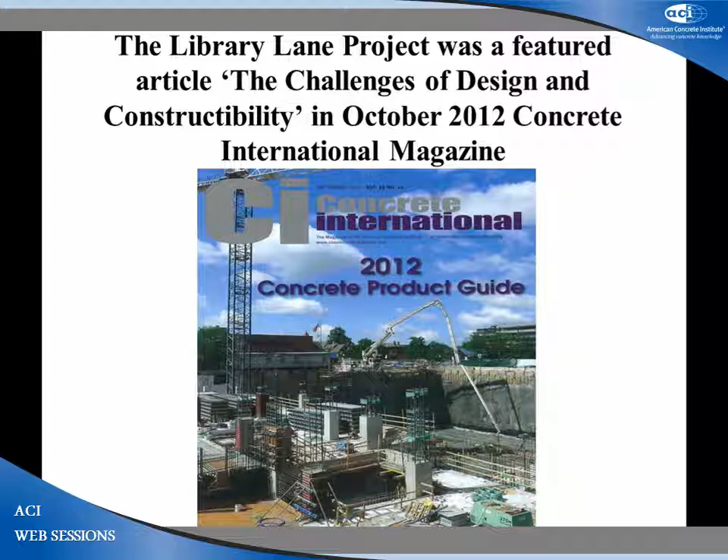A quick thank you to the team, and it was a team effort. It was one of those jobs that we thought was never going to start, which actually worked to our benefit because we were able to do all our homework, and by the time we got ready to place concrete, we pretty much had all the answers to the questions.

So thank you to Carl Walker Inc., Chrisman Construction, who was the CM on the job, Chrisman Constructors, who were the ones that actually placed and finished the concrete, and of course our good friends at Doan Ready Mix, who supplied all the concrete and gave us the opportunity to do what we did with the mixes. Not always are ready-mix producers willing to allow admixture people, or cement people for that matter, in on the process, because we brought the cement manufacturer's QC manager into this also in the early phases of it. But a thank you to everybody.

Like I said, it was a 55,000 yard job, high strength, low shrinkage. It was interesting. We did this talk for the Carl Walker people down in Kalamazoo, Michigan, and they broadcast it to all their locations across the country. And it was interesting. Gail Vasana said to me, 'Is our specification too tough?' And if anybody has ever worked with them, their specification is quite tough.

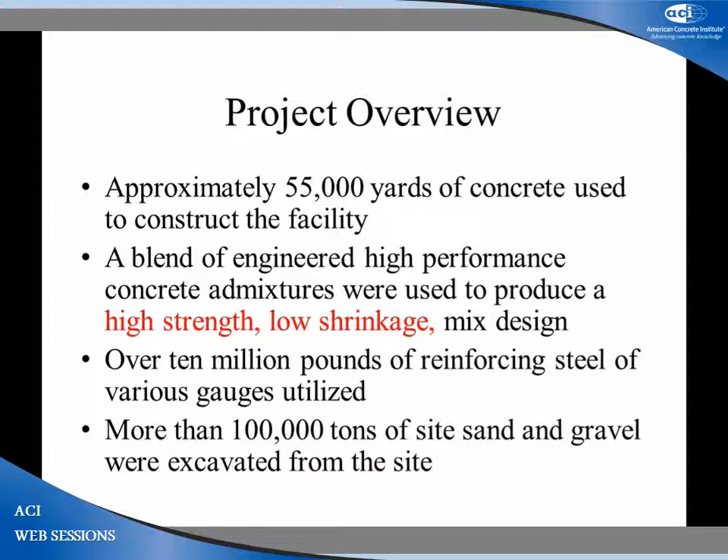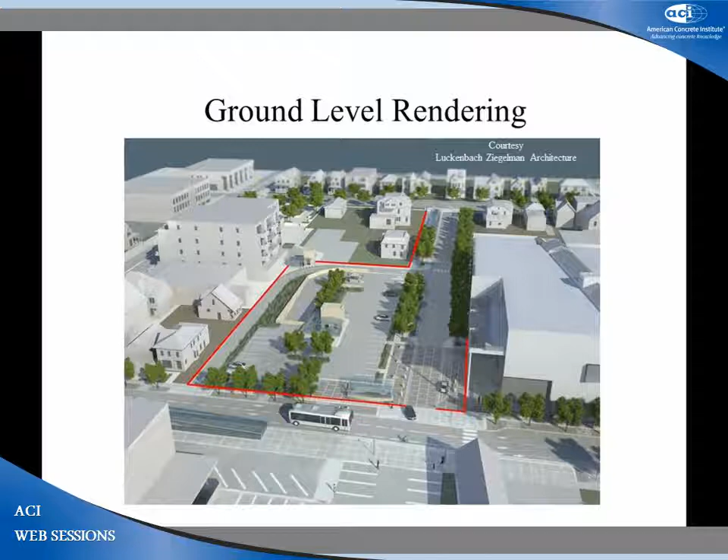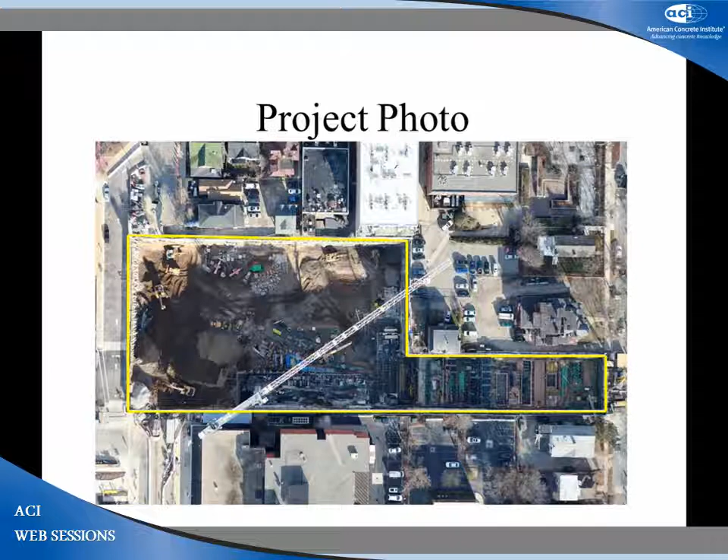What an engineer wants and what a contractor needs are not always one and the same. And our goal for this job was to not only satisfy Carl Walker, but also to satisfy Chrisman Constructors.

In the article, in my portion, I asked the question, is it possible to design a perfect mix design? By the time I get done here, I hope you will agree with me that the answer is yes.

The title was Challenges of Design and Constructability. It probably should have been more like Challenges of Design versus Constructability, because engineers and contractors are not always on the same page at the same time.

I'm going to discuss briefly the two main concretes in the project. We had a 20,000 yard mass mat placement, and it was interesting because they were back and forth on what type foundations they were going to use for quite some time, but that bought us time to design our mixes, take time for all the shrinkage tests and so on. So it worked to our advantage, and at the end, when they decided they were going to do a thick mat foundation, of course the ready-mix producer, myself, and my cohort Tony Candeloro, I think we went out and had a beer, because that was another 20,000 yards that was going to be placed on that project.

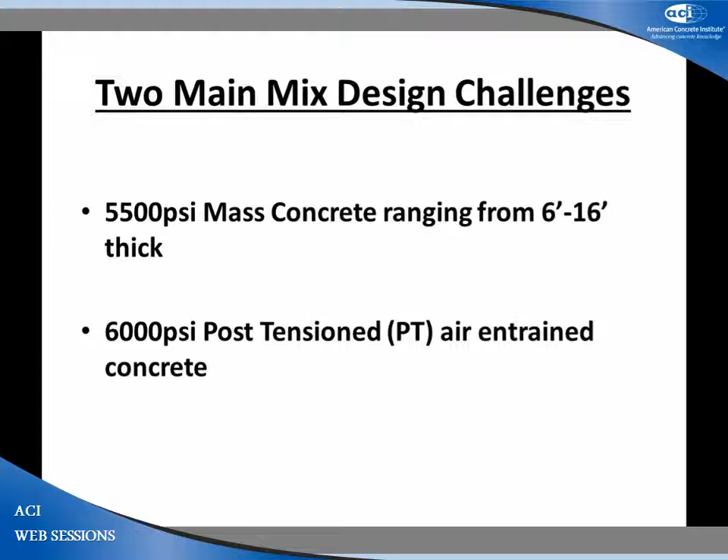Briefly on the mass concrete, as so many specifications say, maximum concrete temperature at placement is 70 degrees. This can be a huge problem, and in my opinion, unless you're designing mixes that have boulder size aggregates and you have cooling coils in the concrete, you can't always do what we would like to do with mass concrete.

If you prescribe, as I do, to the 'if you can't keep it cool, keep it warm' theory with mass concrete, then all of a sudden that maximum concrete temperature at placement is not the key number we're looking for. What we're looking for is what our ultimate internal temperature of that concrete is going to be.

So as a team, we agreed to forego the 70 degrees. Let me back up one second: when this was all going on, originally the mat placements were going to be done in the summertime, so that made this 70 degrees maximum temperature even more critical.

Anyway, as a team we agreed that wasn't the number to focus on. 160 degrees, which is pretty much accepted in the industry, was the maximum internal temperature we could wind up with, and we would focus on the differential between the internal temperature and the temperature at the outside of the concrete — that's our delta T.

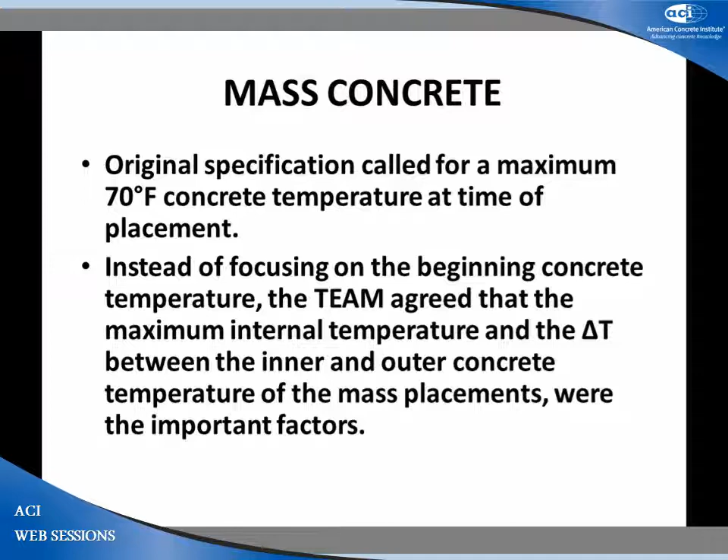Again, we agreed on a maximum of 160 degrees. Our maximum delta T was 35 degrees. There are some now that say, since this was a limestone mix, you can go to 45 or 50, but we stayed on the conservative side. So our maximum internal versus external temperature had to be maintained at no greater than 35 degrees Fahrenheit.

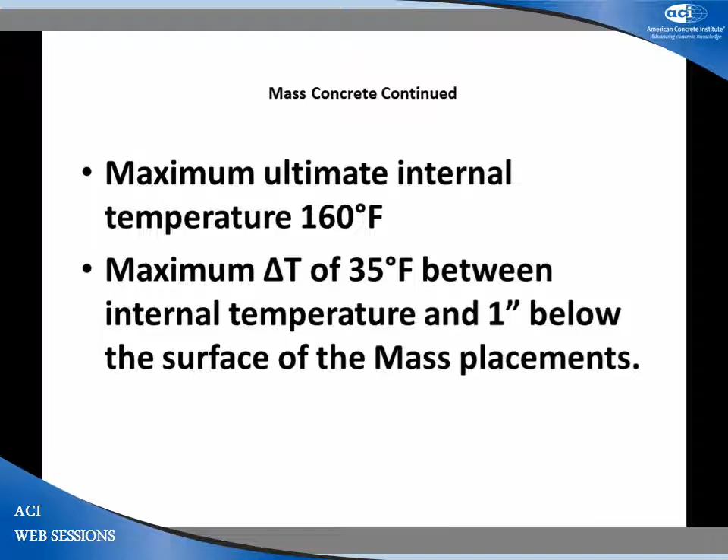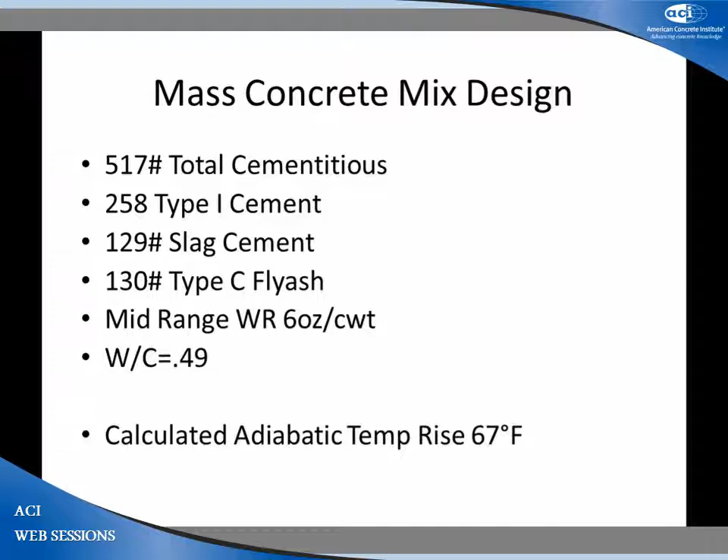So what that told us is that as long as we didn't exceed 90 degrees, plus or minus, with our initial concrete temperature, we would not go beyond that 160 degrees. We did a mock-up, a 10-foot by 10-foot by 10-foot mock-up with thermocouples, protected it, did all the things we would do when we got ready to place the concrete. We were able to determine we were not going to exceed that 160-degree maximum internal temperature.

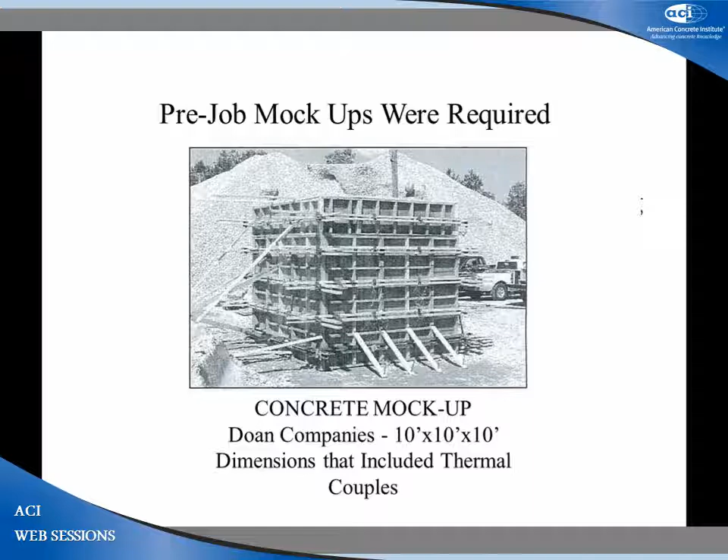Well, as a lot of jobs go, the job that was supposed to go in the summer actually went mostly in the winter for the mass concrete. Now we were not concerned about our maximum temperature, but actually what our minimum temperature was going to be. That was pretty easy to take care of, but for those who have prescribed to the 'if you can't keep it cool, keep it warm' theory, maintaining that 35-degree delta T in the wintertime is much more difficult than in the summertime, because in summer the ambient temperature works in your favor, whereas in winter it works against you.

So the contractor had a lot of experience with mass concrete, and they placed down 2-inch rigid insulation, then concrete blankets over the top of the mass placements, and everything went quite well.

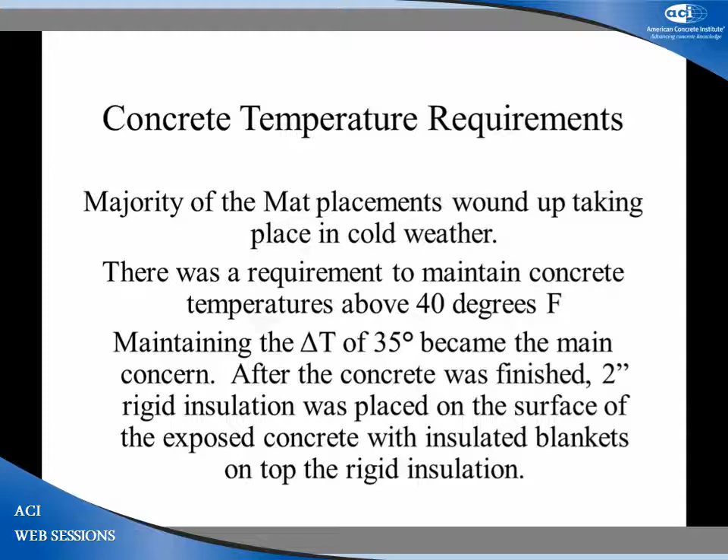The largest placement was 5,700 cubic yards of the 20,000, and it was noteworthy because for those of you that don't live in the North Country, in Michigan we have something referred to as frost laws. And what that means is when the frost laws go on, sometime prior to spring, and this year who knows what date that was, but the frost laws have been on since February 1st.

What that means to a contractor and a ready-mix producer is that instead of hauling 10 yards of concrete, now you can only haul about 4. Well, how in the world are you going to place 5,700 cubic yards at 4 yards at a crack in an urban setting? Obviously, this wasn't going to happen.

So the powers that be in the city of Ann Arbor forewent the frost laws, and also the street we had to work off of was a one-way street going northbound, and they had to change the direction of the street to allow the trucks to come in southbound. So it was more of a logistical problem than it was concrete, because mass concrete is pretty easy.

In any event, 5,700 yards, stone concrete, drivers drove the first 14 hours, and then their crosstown competitor actually agreed to supply drivers to drive the next 12 to 14 hours. Well, they get over there, and as things happen, they had forgotten their proof of insurance. So now all of a sudden they're at a dead standstill after 14 hours of placement.

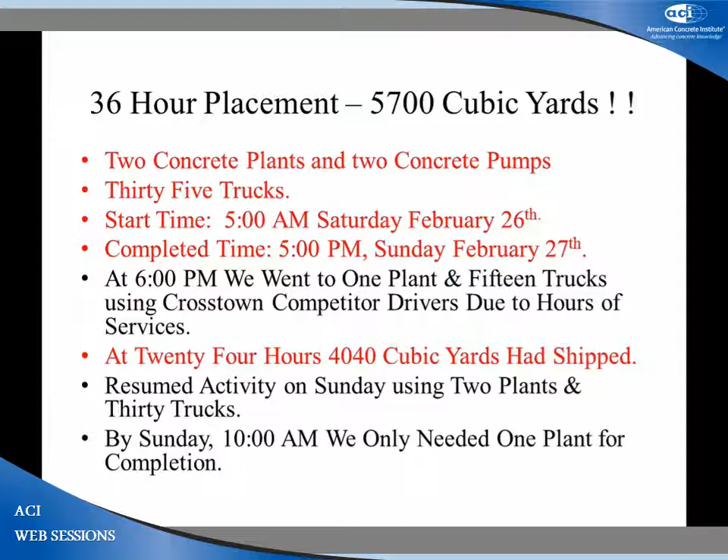The 5,700 yards doesn't sound like a lot, and I was involved with the placement at Metro Airport some years ago, Detroit Metro Airport, where we did 21,000 yards in 23 hours. And I think that may still be a record in the United States. But that was a particular situation - we had not only the urban setting, but we only had one place for 2 pumps to be located. So logistically, it was a very tough pour.

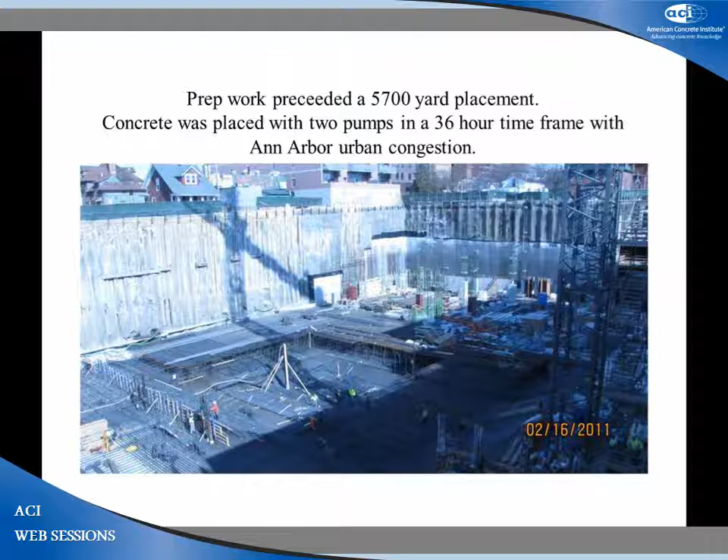Okay, I'm going to move on to what I really want to talk about now, and that's the designer's needs for the post-tension slabs. In this case, it was 6,000 psi air-entrained concrete. That becomes significant in a moment. I'll show you - water cement ratio of 0.40.

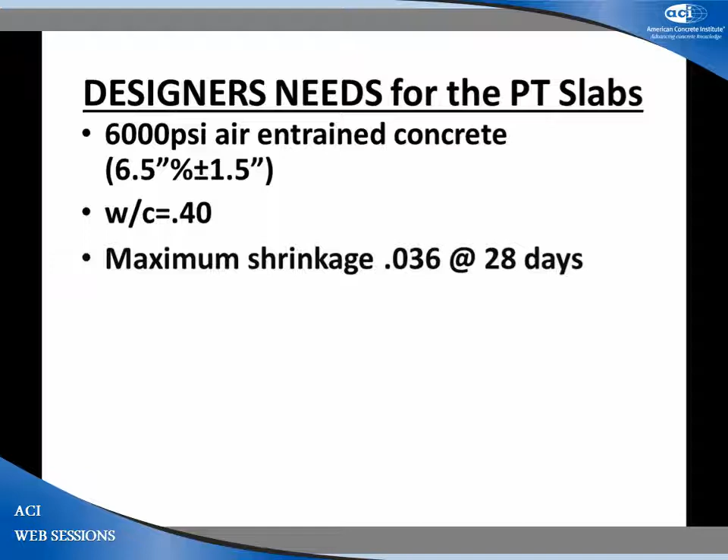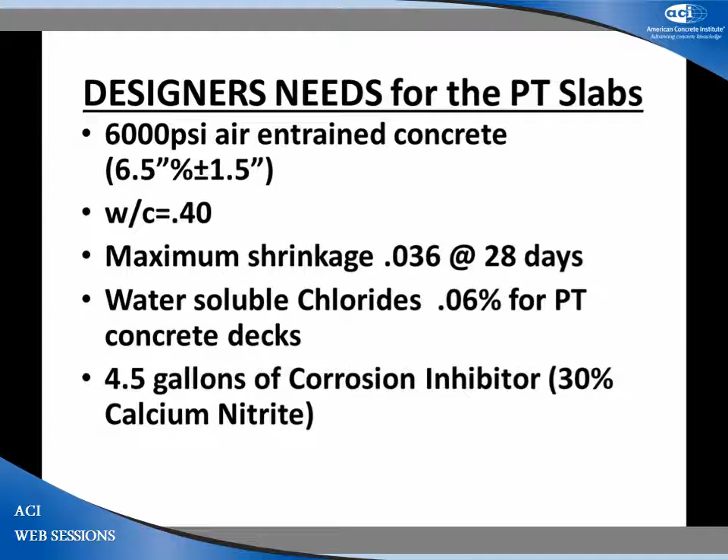Maximum shrinkage at 28 days of 0.036. Water soluble chlorides 0.06 for post-tension decks. Here's the kicker: 4.5 gallons of a corrosion inhibitor that contained 30% calcium nitrite. For those of you that have worked with corrosion inhibitor like this, they're very good corrosion inhibitors, but they're also wonderful accelerators. 4.5 gallons is a large dose. Typically you see 3, maybe 4, but 3 primarily, and this wound up being 4.5 gallons.

Lots of testing on this job. Every load of concrete was checked for air. Every load. Microwave testing, our wonderful friend the microwave. In the Midwest, we're not real comfortable with the microwave. I know on the East Coast it's an everyday occurrence, but we haven't had a lot of success, I'll be quite honest with you.

Our first pour, our first mass pour, was a 1,500-yard placement, and they started getting water cement ratios from the microwave of 0.67 when we're looking for a 0.49. Well, the concrete was too beautiful, and everybody agreed, we'll figure out what's wrong later. We even actually went to the extent of pulling more water out and putting more mid-range in, and our water cement ratio, according to the testers, went up. So we knew there was something wrong. As it turned out, it was simple calculations, and after that, everything went well.

But they did cylinders at 50 to 100 yards. It was a very highly tested job. They actually did hardened air testing, and luckily where they cored, our hardened air parameters were perfect. So we got lucky there.

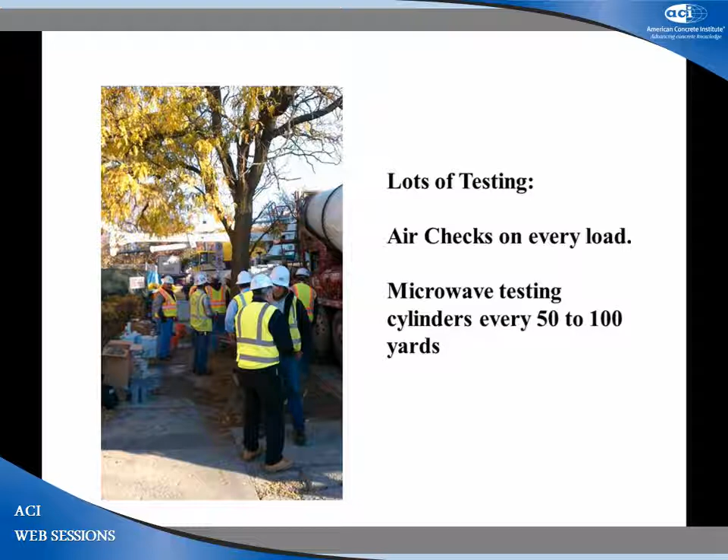Those were the designer's needs.

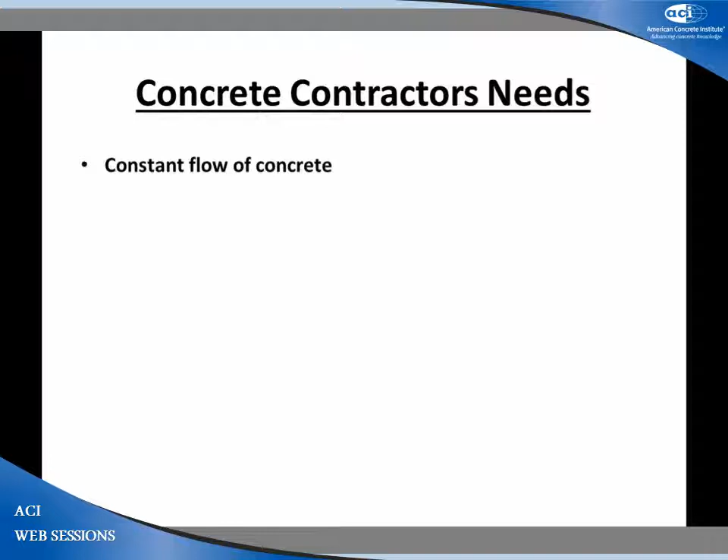Now the contractor's needs. They needed a constant flow of concrete, obviously. They needed a ready mix producer that was going to get concrete to them nonstop to keep the flow going. And that can be a challenge in itself in an urban situation. The concrete had to be pumped a city block in most cases, because like I showed you, we were stationed at the east end of the project and had 2 pumps there on a residential street, and that's where everything happened from.

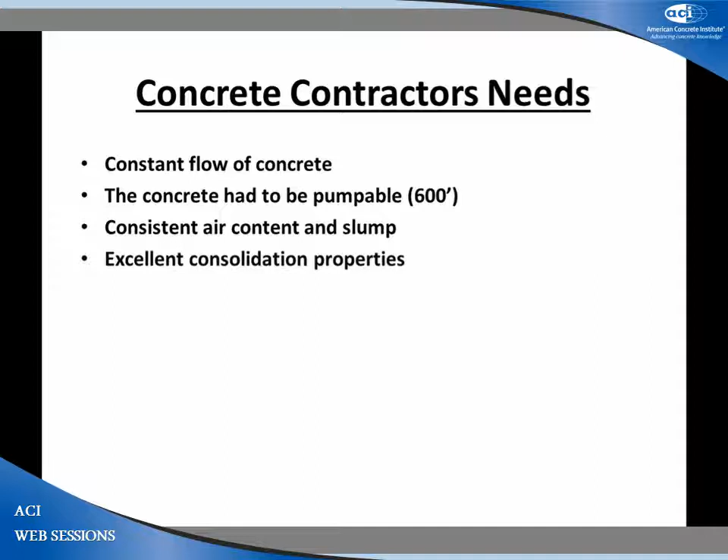Since they were testing the concrete, we needed consistent air and slump. The concrete also needed excellent consolidating properties because of the post-tensioning tendons and the reinforcement in the columns. As they were placing the concrete, it had to be easily consolidated.

It had to be easily placed and broomed. This was more of a situation in warm weather, because the contractor was doing a similar job in another city at the same time, and they were having all kinds of problems. They were having to pour at 3 and 4 o'clock in the morning and still weren't having a whole lot of success. So the pressure was on us to design something that would work a whole lot better than that, something that was easily placed and finished.

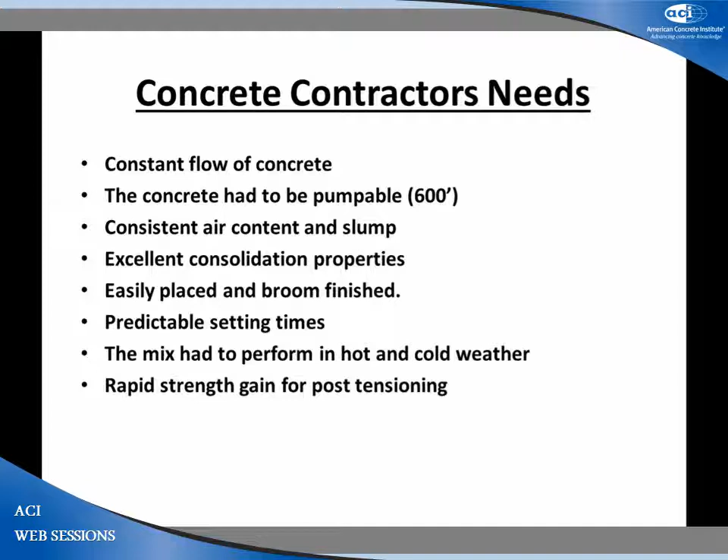They needed predictable setting times. The mix had to perform in both hot and cold weather, because we did as much concrete in the wintertime as we did in the summer. And after all these things, they needed rapid strength gain for post-tensioning purposes. They wanted to be able to post-tension in 24 to 48 hours maximum, winter or summer.

The challenge, obviously, was to meet Carl Walker's specifications, which were numerous, and also to manipulate the concrete so it acted like 70-degree concrete on a 70-degree day. That was really the challenge.

Whenever you see a specification that calls for a water-cement ratio of 0.40 or less, the first thing that comes to mind for someone designing concrete is the use of a high-range water reducer. For structural concrete, I agree wholeheartedly, but I started my career as a finisher, and I tend to look at concrete more through the eyes of a flat work contractor. A high-range water reducer may or may not be suitable for finishing concrete.

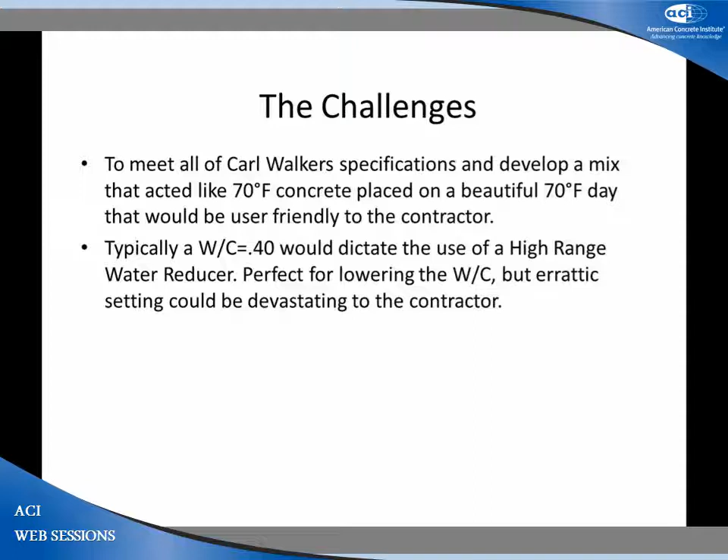The real challenge, besides everything else in the specification, was that the spec called for 4 gallons of the corrosion inhibitor. Because of the water-soluble chlorides of the concrete we produce, we had to add an additional half gallon to compensate for being over a little bit. So we wound up with 4.5 gallons.

And did I mention the concrete was air entrained? Carl Walker is a stickler for wanting their air to be perfect.

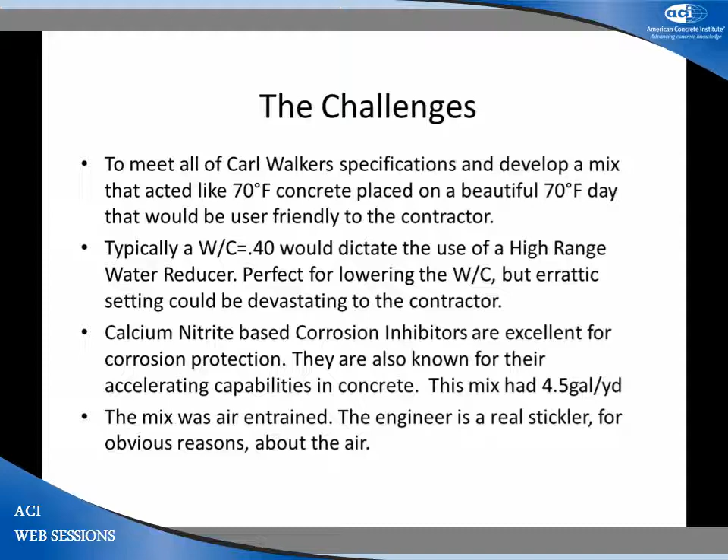What were the solutions? First, we determined how much cementitious—really, how little cementitious—we could use to make 6,000 psi air entrained concrete.

If you use too much cementitious material, that drives your water-cement ratio up, it drives your shrinkage up, it drives a lot of things up. So the goal was to use as little cementitious as possible, but still make our 6,000 psi at 28 days.

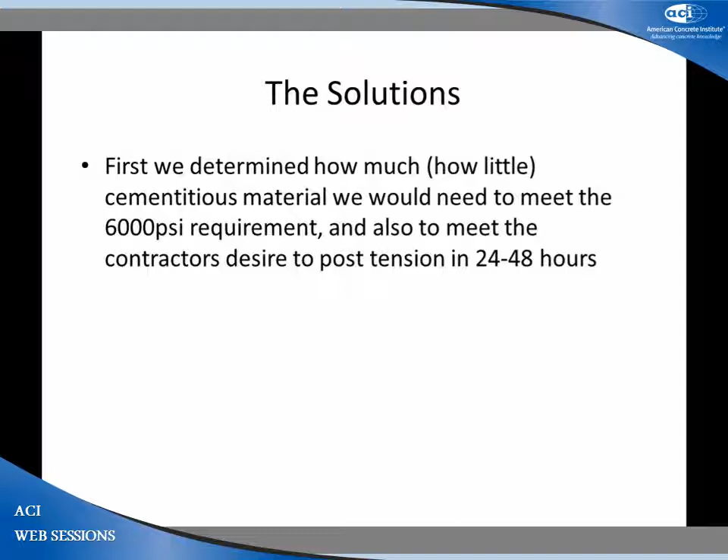But on the other side of the coin, we had the contractor who wanted to be able to post-tension in 24 to 48 hours. So it's one of those situations where they wanted their cake and to eat it too.

After analyzing the amount of fly ash and slag that Carl Walker would allow us to use, we determined the amount of cementitious material we wanted to use, and we started looking at what we needed to manipulate this concrete so it would set properly. We'd already satisfied Carl Walker's needs; now we had to satisfy the contractor's needs.

So we set out to manipulate the set of the concrete with the use of admixtures. Again, our goal, whether winter or summer, was to create concrete that set like it was 70 degrees on a 70-degree day.

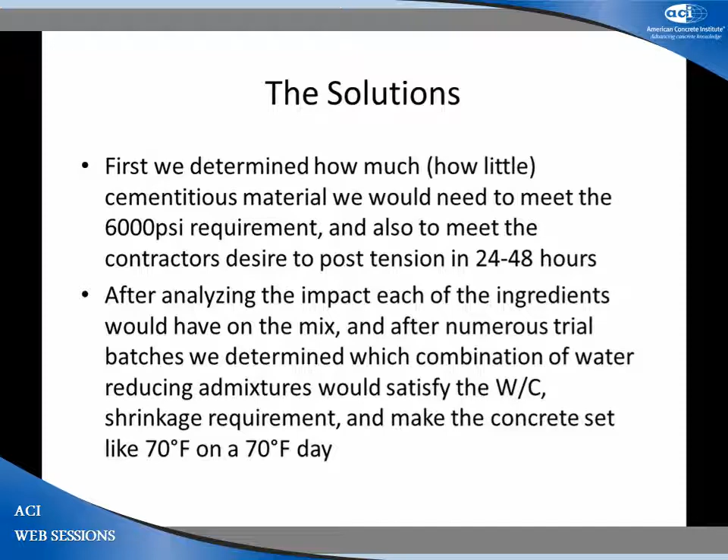60% fly ash, 15% slag, 25%... sorry, 60% cement, 15% slag, 25% fly ash. The 15 and 25% were set in stone by the specification, so we couldn't go up or down on those. We did use a crushed 1-inch limestone. We took a page out of Bill Phelan's Athletic Concrete book and tried to maximize our coarse aggregate.

Knowing we had to pump this concrete a city block, we did have restrictions in that regard. The mix has 4.5 gallons of corrosion inhibitor, and we had 223 pounds of water, which is a 0.40 water-cement ratio.

And this is where it got fun. We wound up using 6 ounces of what I'll refer to as a hybrid mid-range. It's a lignin-based product with a splash of polycarboxylate and a defoamer. Then we used 5 ounces of a traditional lignin-based water reducer, knowing we got decent water reduction with this combination, but we knew we were getting quite a bit of retardation—that was our goal. Our goal was to offset the acceleration of the corrosion inhibitor.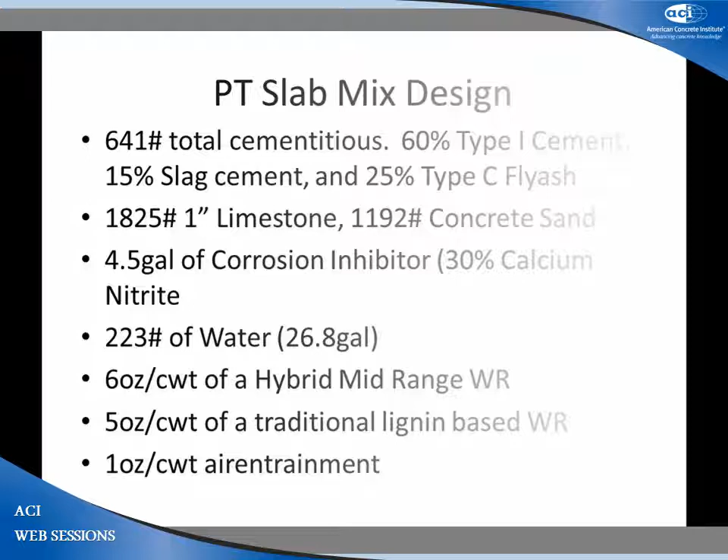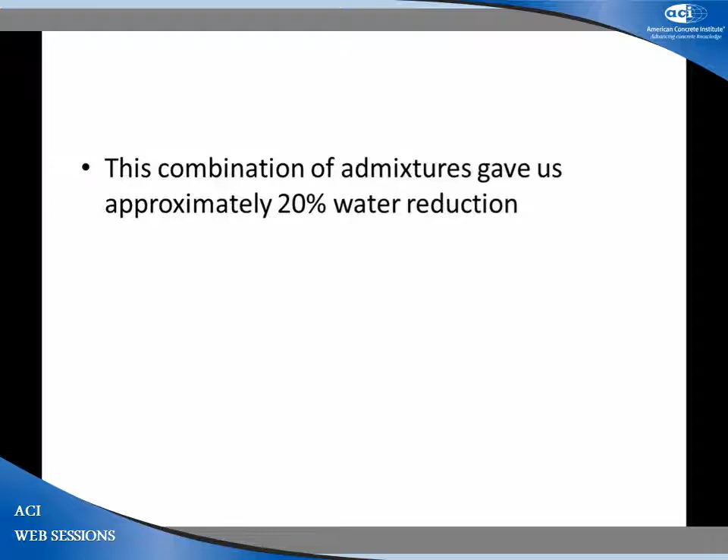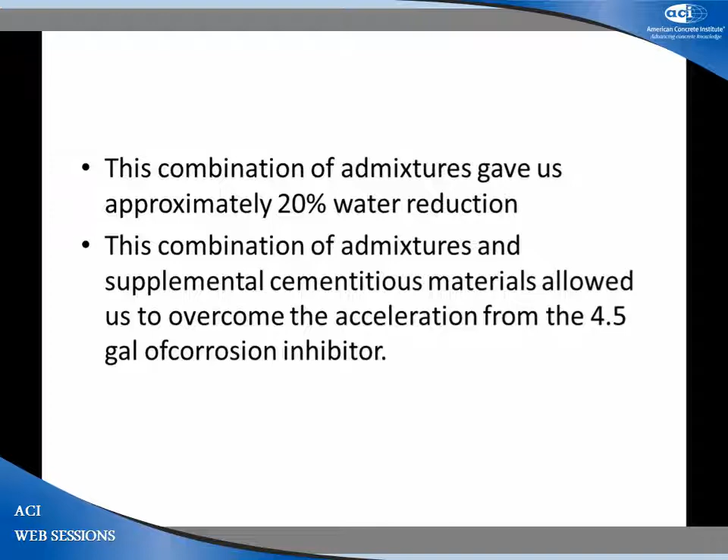The combination of admixtures we used gave us approximately 20% true water reduction, so we got into that high range category, but we didn't use a high range product to do that. The combination of admixtures and the supplemental cementitious materials allowed us to overcome the acceleration of the 4.5 gallons of corrosion inhibitor. We did testing.

The concrete contractor thought we needed more water in the mix in order for his finishers to have time to place and finish the concrete. So we did a test pour to accomplish a couple of things. We redesigned the mix, added water, which also meant we had to add cementitious material.

We placed our mix and let the finishers decide which concrete they wanted to use. We also used this as our example for the owner to decide what type of broom finish they wanted, since there's a multitude of broom finishes out there. As it turned out, the finishers chose the mix we had already put together and tested, thank goodness. I don't know what we'd have done if they'd gone the opposite direction—we'd have had to start over, but again, a lot of testing.

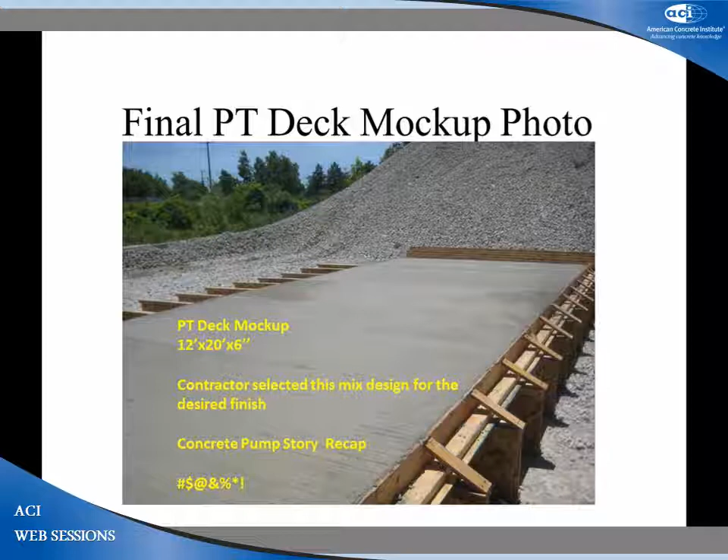The interesting thing about this concrete—it outperformed my expectations in a couple of ways, but it did not bleed. This concrete never bled. In the wintertime that was great because we didn't have to worry about bleed water freezing. But in the summertime, I was concerned we wouldn't have enough lubrication for the finishers to do what they needed to do. It did not turn out to be the case.

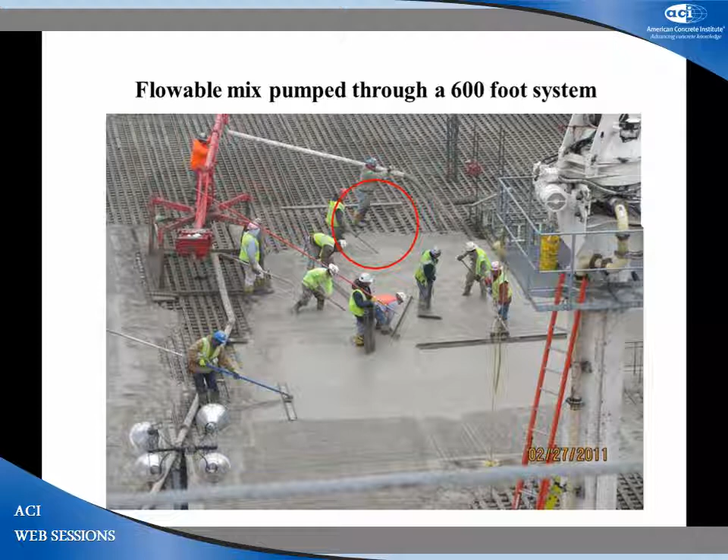We placed the concrete typically in the 7 to 8 inch slump range. We were losing virtually nothing through the 600 feet of pump line, and we weren't losing more than 0.5% air either.

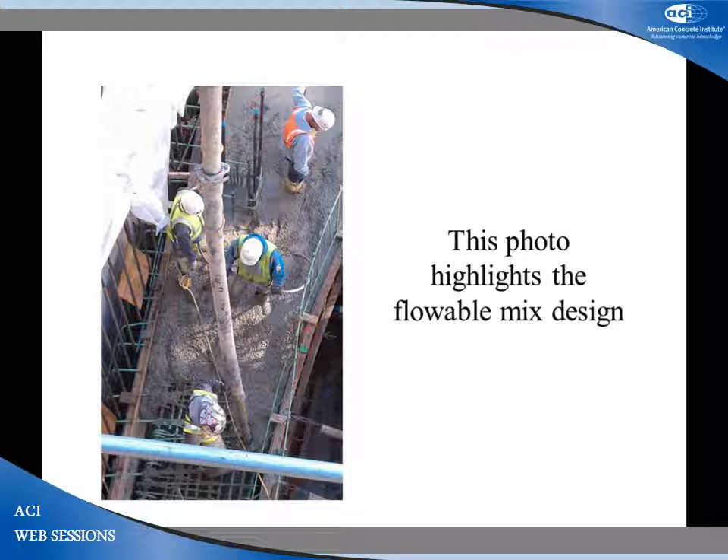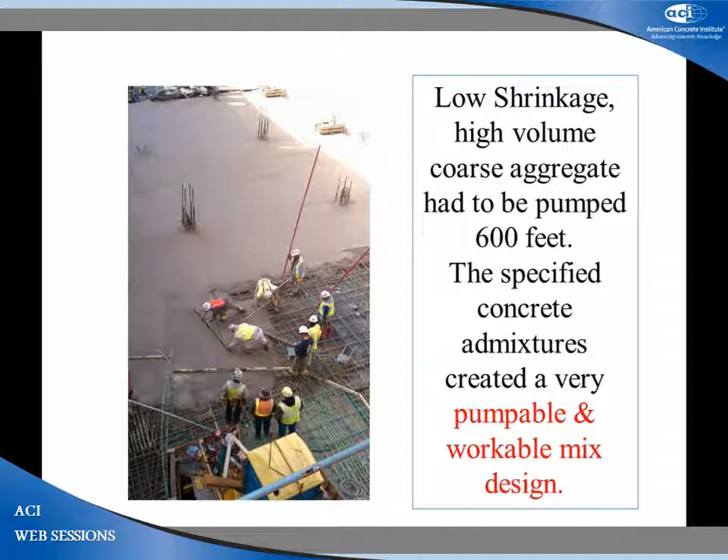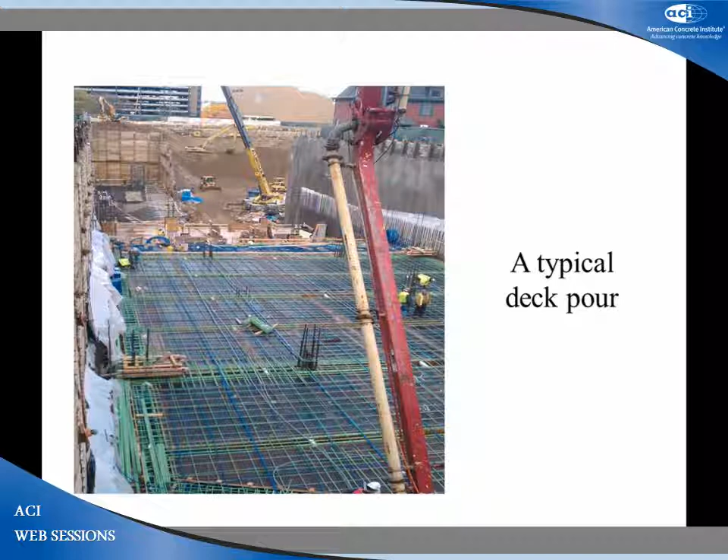In order for this job to work, there was significant pre-planning on the part of the ready-mix producer, ourselves, and the cement supplier. Our goal was to satisfy the engineer and the contractor.

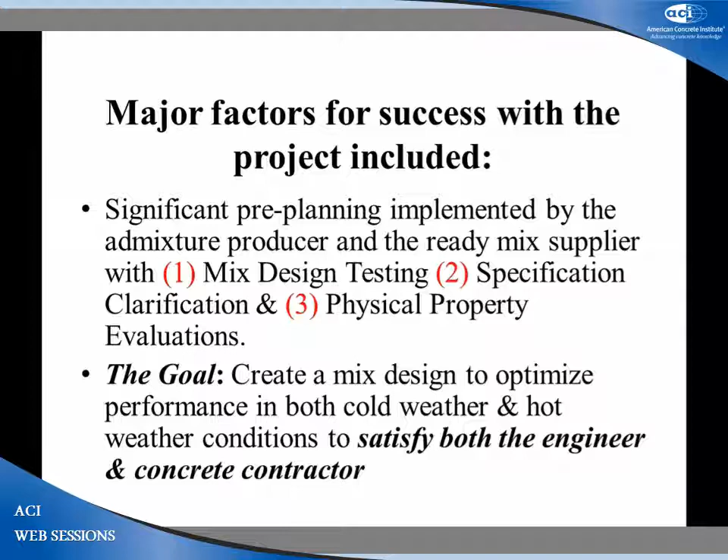Is Doug Peters in the room? I guess not. He's VP of operations for Christman Constructors, a good concrete guy, a tough concrete guy. At the end of the day, you can read the other verbiage, but this mix design performed better than any previous PT mix in his career. That was a real testament to the fact that we had accomplished our goal.

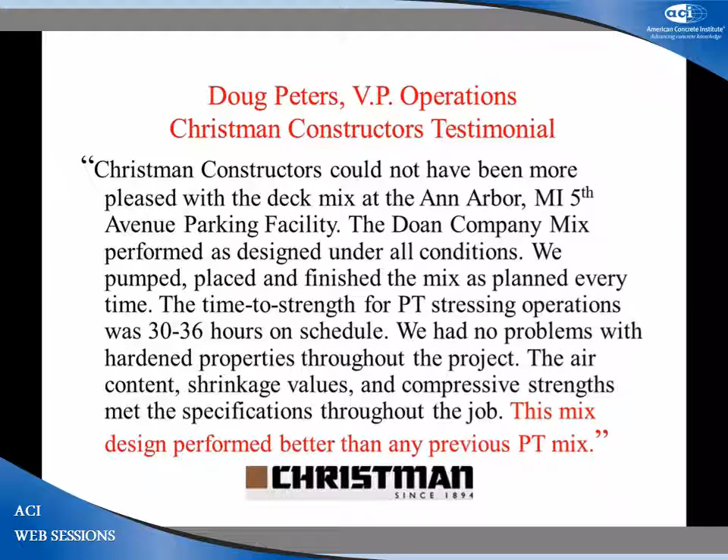The teamwork, attention to detail, pre-planning, and coordination all spelled success. And to answer the question—can you design a perfect mix design—after this job, the answer is definitely yes.